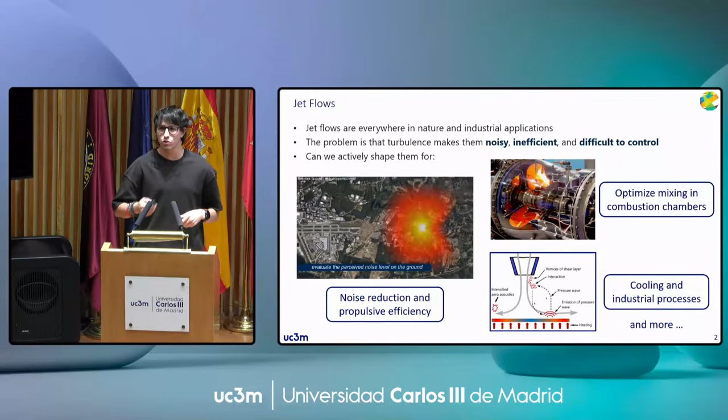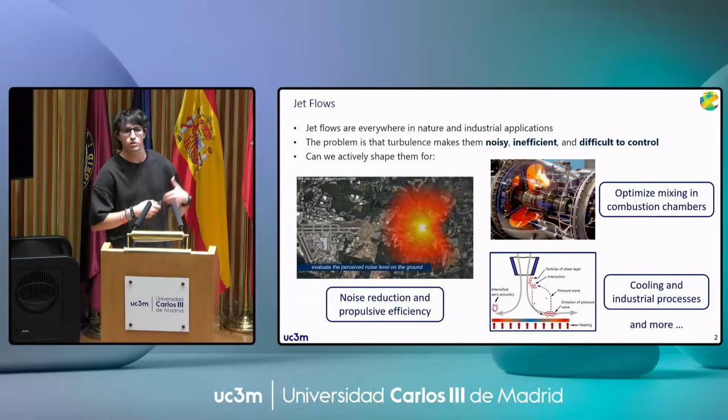Jet flows are basically everywhere in nature, but especially also in industrial applications. They're amazing to move momentum, but of course they have some issues, especially when they become turbulent. You can think about noise—the typical example is the noise reduction issue in aviation, which is limiting operations of airports and aircraft. You have the optimization of mixing in combustion chambers to reduce the production of pollution and increase the performance of combustion, but also for cooling, which is very interesting for electronic device cooling.

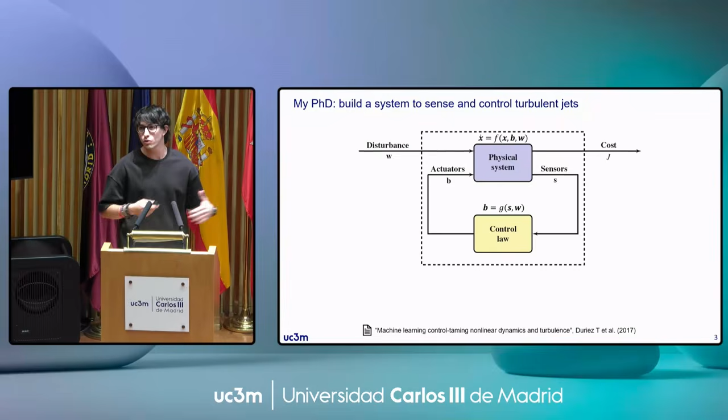My PhD stands in the development of a system to observe and control jet flows, turbulent jet flows. We can think about the typical control loop of a system, where we have a physical system—in our case, the jet case with a certain dynamic F, where we can evaluate its performance with a cost function we call J. Then we sense what is really going on in the jet with some sensors, we feed the control law, which actuates through some actuators.

Now, when you try to apply this to fluid flows, it becomes a bit more complicated because you have a very high-dimensional problem. You have Navier-Stokes, which are highly nonlinear. And then you have issues also with where you place the sensors, how you are really actuating.

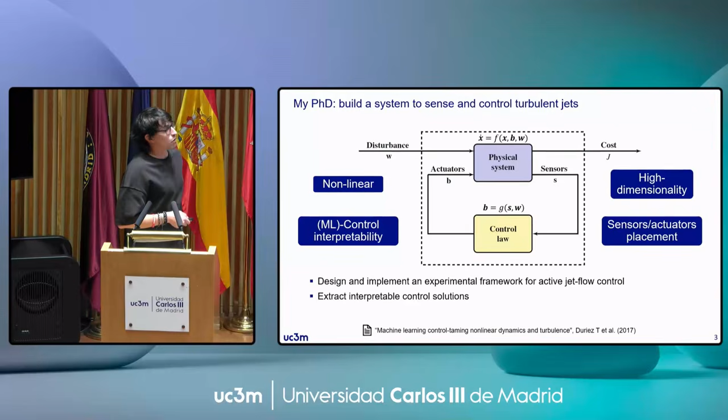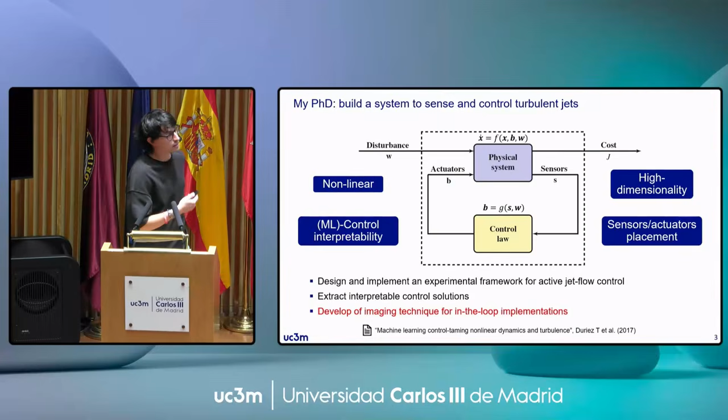My PhD is basically about the design and implementation of a jet flow facility for control, getting some control solution that we can interpret. And as you will see, it became also the development of some imaging technique for in-the-loop implementation of this sensing technique. Now I'll start quickly going through the physical system.

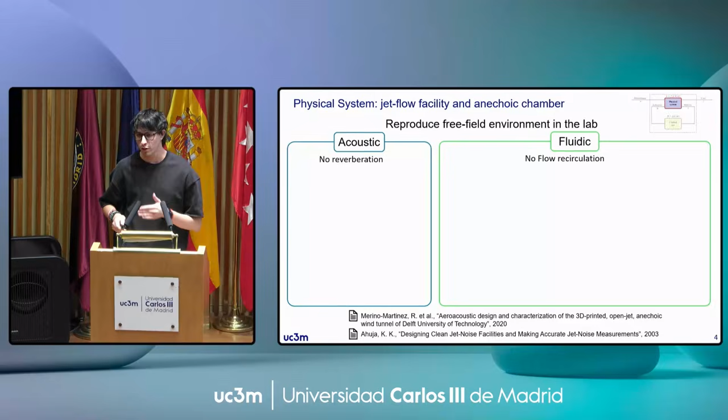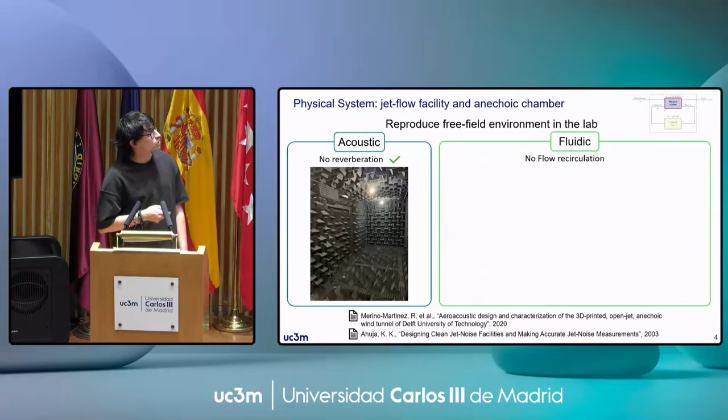Basically, no facility, no experiment. So we started doing our facility. We wanted to reproduce the free field environment, both from an acoustic point of view—so we had to insulate our room where we were doing experiments, also from the point of view of reverberation—but also from the fluidic point of view, which means no recirculation inside our room. So we built also this kind of secondary room where we have the dissipation of the jet flows.

This was the beginning of the PhD. And this is kind of the final result that we got here at our university in the lab.

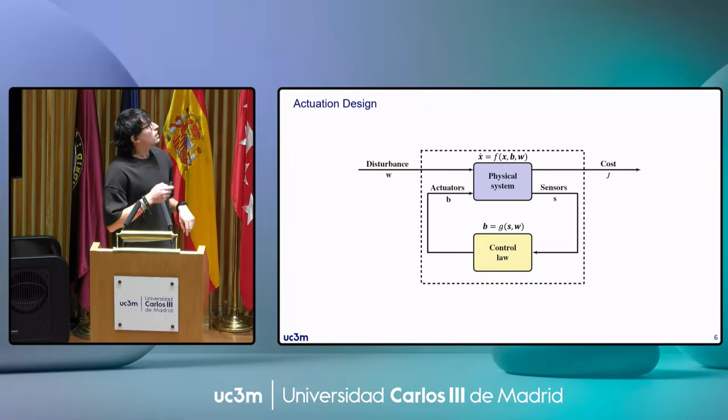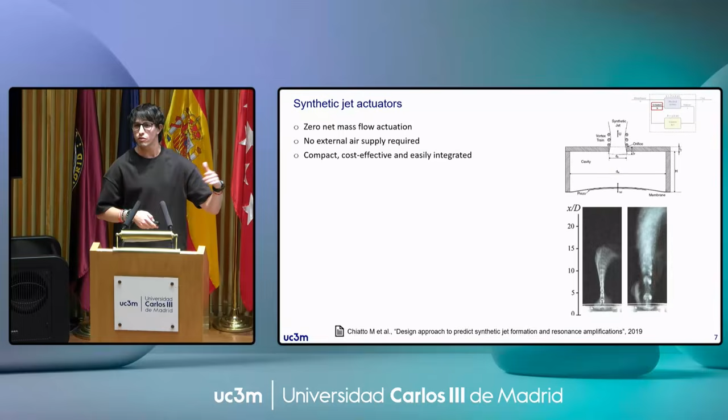Now, moving quickly also to the part of actuation, we decided to actuate using synthetic jets. Synthetic jets are an amazing device, which are very compact, portable. They allow you to entrain some momentum inside the flow. Basically, it's made by a membrane in a cavity, which is oscillating, and the changing volume inside the cavity is generating a trail of vortices, which is introducing a momentum inside the flow.

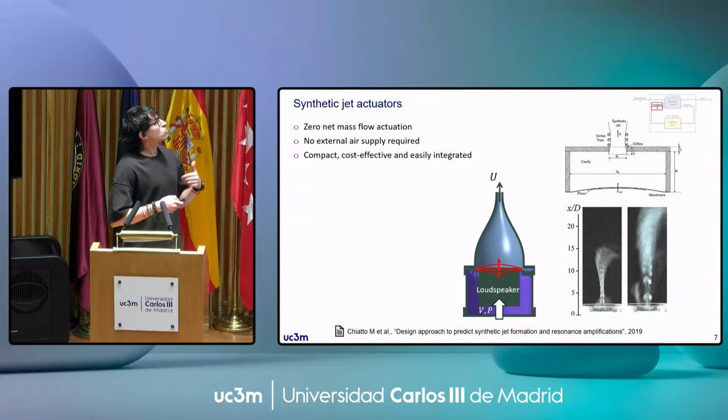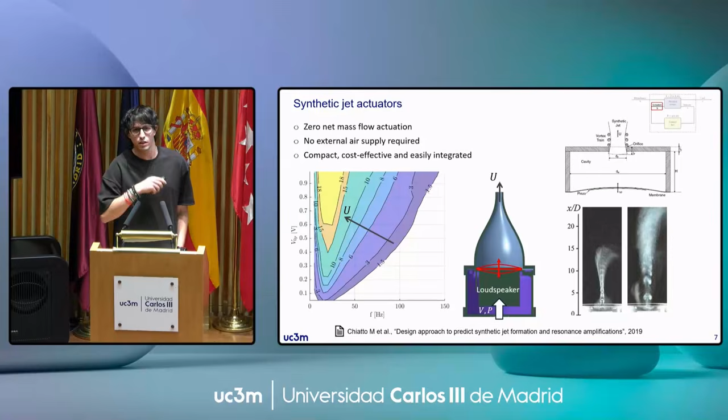So we built our own—again, in our case we have loudspeakers that are our membrane, which is oscillating, and you can characterize it, and then basically you can build your actuation. You can actuate at different frequency and different velocity, depending on the power and voltage amplitude that you put at your actuators. And this is a kind of final result that we had.

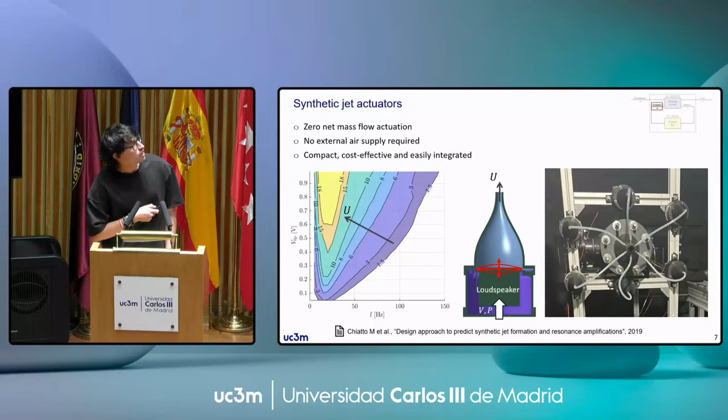We have like 6 of these synthetic jets mounted radially, actuating on the main jet, which is this one at the center. So we are shooting radially.

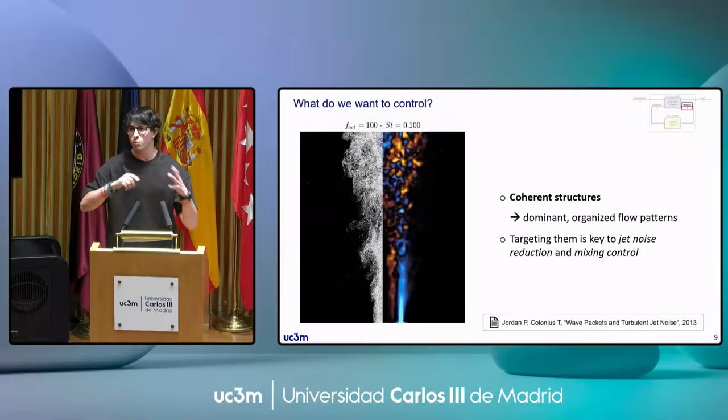Now, moving to the most interesting part, probably the sensing part. So you are controlling a jet. A jet is typically made of very coherent structures. Coherent structures means like this dominant pattern in your flow that are dominating the dynamics of it. And if you want to trigger, you want to control noise, you want to control mixing, usually what you have to do is go against this kind of structure or control them.

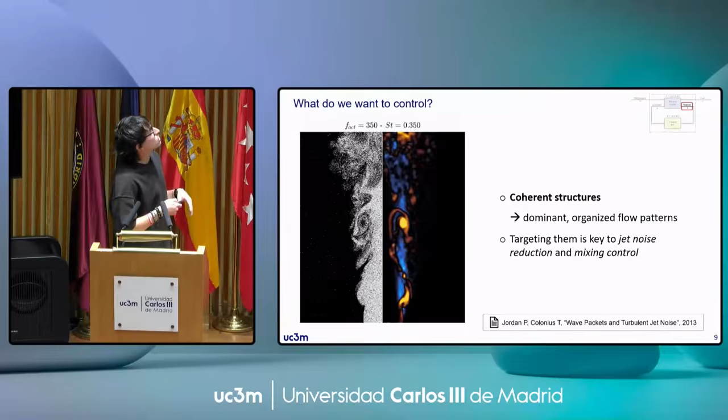So here you can see on the left a visualization in an experiment. We were exciting specific structures and we were visualizing them with PIV.

And these are the kind of features from simulation, the main features and coherent structures that you get in a jet. Typically what people do when they do experiments for jets is put some sensors, for example in the red block, where you have microphones sensing the jet, trying to sense exactly these coherent structures, and then you actuate against these.

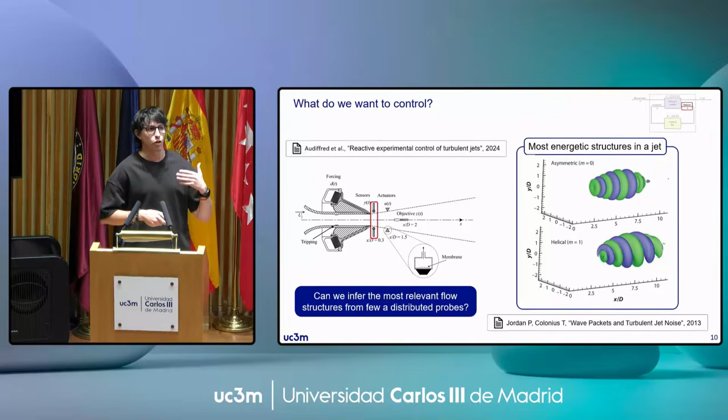So can we really infer the coherent structures dynamics from these very few sparse probes that we have around? First thing we did was, okay, let's go to the lab, we do our experiments, we have our jet, we place our probes inside. The probe sees some signal, all right?

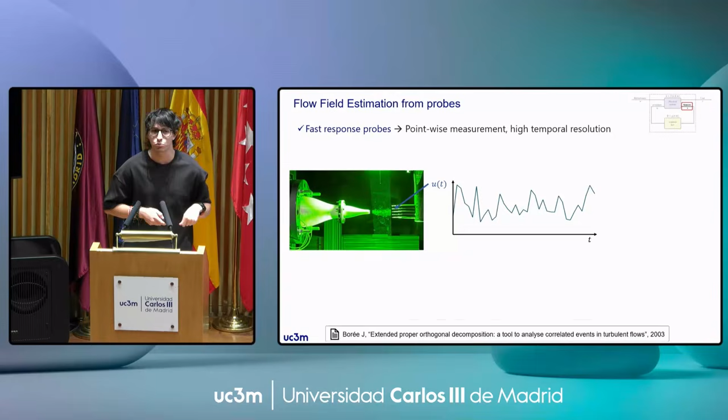Then we have also PIV. PIV is amazing, it gives you a spatially resolved measurement of your jet, and so you can see the proper coherent structures. You can get very interesting results, but it's not time resolved. It means you have only one of the snapshots every few time instants.

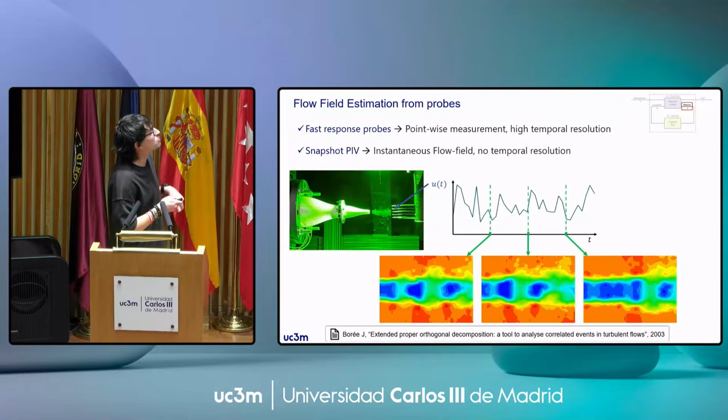In the middle, what can we do? Usually what we do is try to infer what was going on in the middle from the probes. What you do is what we call the enhanced temporal resolution.

So we started doing the experiment. We started with a water jet. We started with some synthetic probes, so they were not real, they were just an extraction of the velocity field in points.

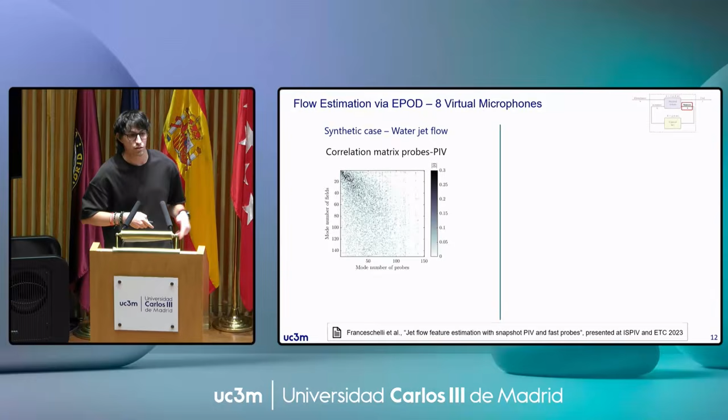And we could see a correlation between the probes and the velocity fields. If you have correlation, you can estimate what is going on in the middle. So this was what we got at the beginning. In our synthetic case, we could kind of reconstruct what was really happening.

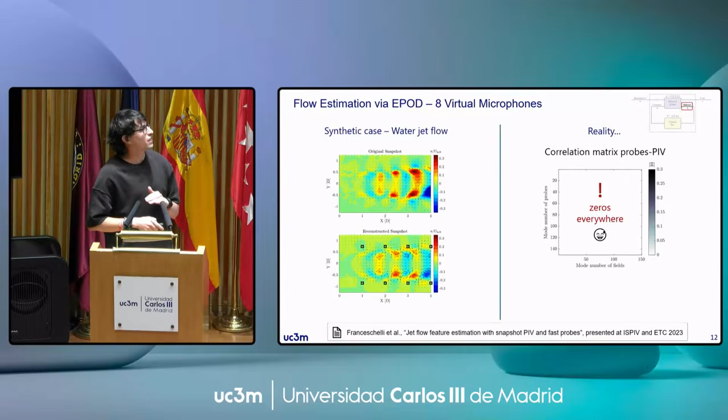But then we moved to the lab. We tried to do it really in reality, and of course it failed miserably. There was no correlation between our probes and the velocity fields. So the flow field failed.

Now, what could we do? Basically it was the end of my first year. I started going around some conferences telling about my failure. And there I basically had the chance to meet this guy.

He's Chris Willert from DLR, or an urban legend is probably myself in the future coming back to tell me a solution, who I was discussing with about why not using velocimetry, imaging velocimetry in the control loop. I mean, the guy is a kind of godfather of PIV, so he kind of gave me a hint.

Well, PIV has an issue because, as we said, it produces a lot of data, and it has a lot of issues because it needs a high-power laser. While probes are amazing, they're very cheap, they give you time resolution. But of course, PIV will provide you with a much larger observability of your system for your control.

Now, the main issue of PIV is that it's based on cameras, and cameras are usually frame-based. It means they suffer a trade-off between the latency, your repetition rate, which you want as small as possible for high-frequency acquisition and description of your dynamics. But if you reduce the latency, you increase the repetition rate of your cameras, and the amount of data rate, which gets huge.

Now, there's a new technology around, event-based cameras, a neuromorphic approach, which basically places in this point, which is like the wet dreams of every experimentalist. So what is an event-based camera?

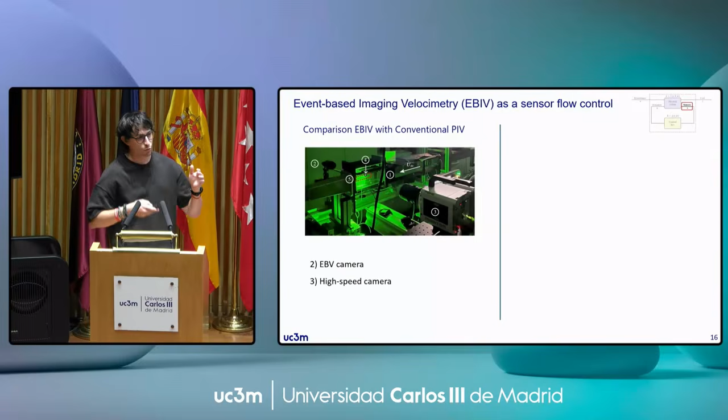We were looking at the same flow field, and we tried to describe that kind of main structure that I was telling you at the beginning. And there's also an interesting difference in the price, of course, because high-speed cameras are in the order of 200,000 euros, event-based cameras is 1,000 euros.

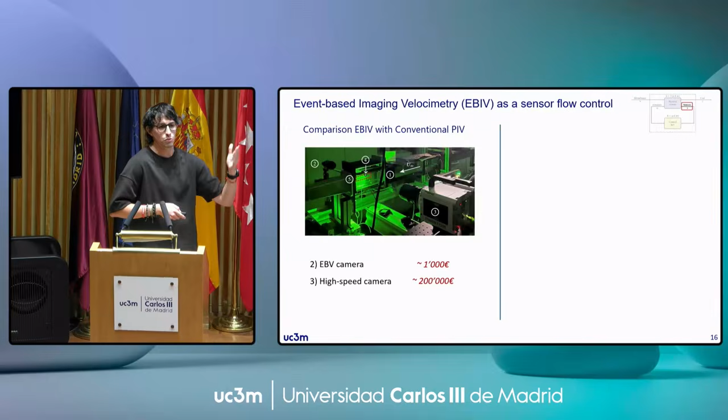And so from that, we moved also to a real-time implementation, meaning that now real-time is a specific word. I would say data-efficient implementation, meaning that you can go at a very high frequency in processing this kind of data from imaging. So we also developed a way to have, from a very low resolution real-time measurement, a high resolution estimation of what the flow is really doing, all of this in real time up to a few hundred hertz.

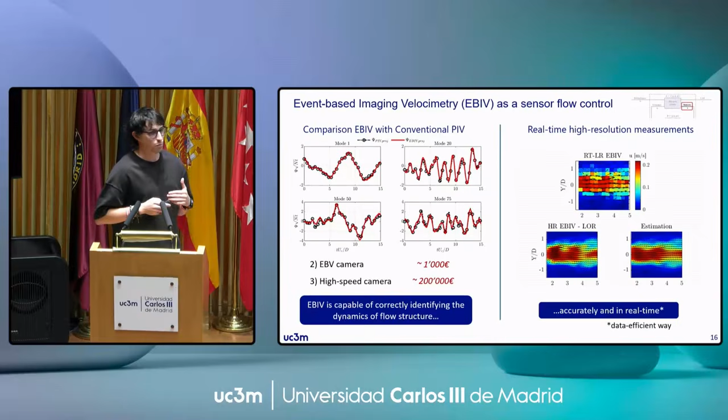So basically, it allows us to say, okay, we developed a new sensing way to observe the flow with a very good observability. So we could now go back to our lab and do the control. So we went back to our jet, and we tried to implement event-based cameras in the control loop.

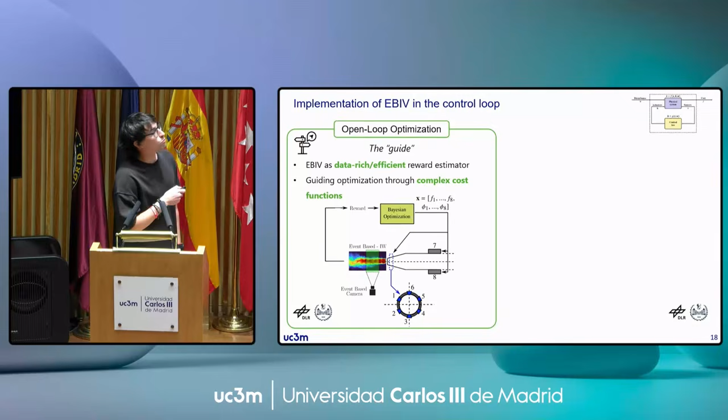So we did it in two ways. The first one was basically simply replacing the reward estimation with event-based cameras. So now we have the jet, which is actuated, and we are evaluating the reward at the exit of the jet and maximizing the turbulent kinetic energy, so the mixing of the jet, depending on what the event-based camera was seeing.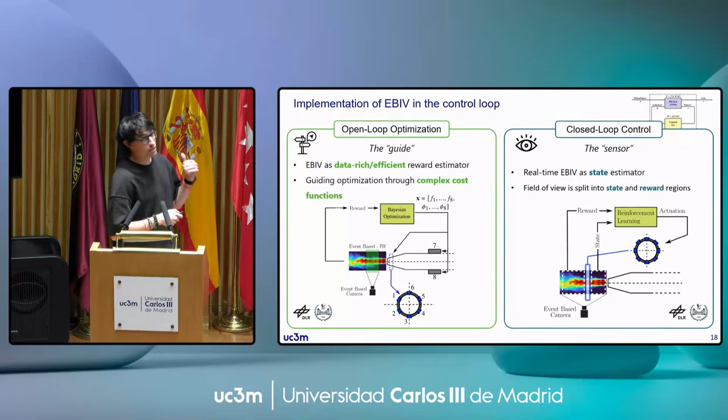A second approach that we did was that now the event-based camera is also providing you not only the reward, but also the state of your system. So we divided what the event-based camera was seeing into two areas, one for state evaluation and one for the reward of your control. Now, going quickly through the results, we have that both kind of worked.

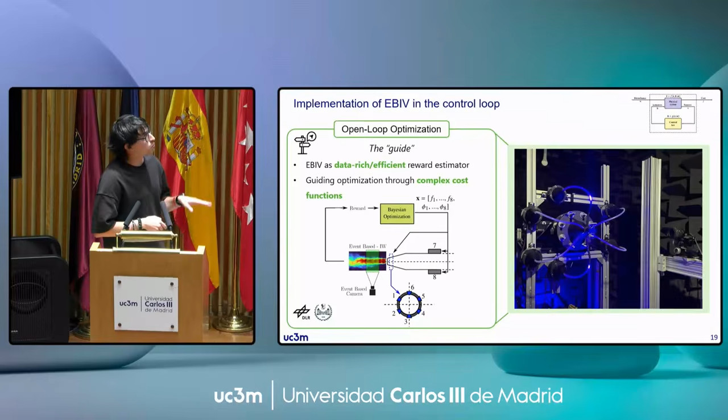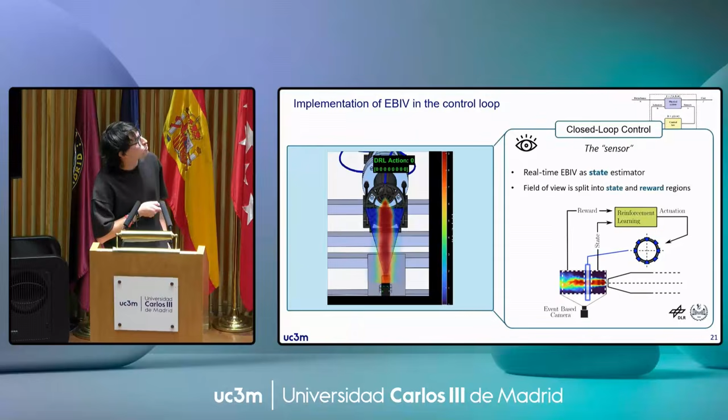Now, then we also, for the part of the closed-loop control, here we have an experiment in water. This is also done in collaboration with Politecnico di Torino and DLR. So here, basically, the first part before the actuation is for the state estimation from event-based, and the last part is for the reward estimation.

And here we implemented the reinforcement learning, which actually with a sufficiently small number of episodes could again increase the turbulent kinetic energy in the reward area.

So, concluding, I'm working in order to finish all of the work that were open and stuff.

And actually, since yesterday, I'm part of the proof of concept of Stefano for trying to bring event-based cameras to a higher TRL level for industrial applications. So these are a few contributions, and that's it.